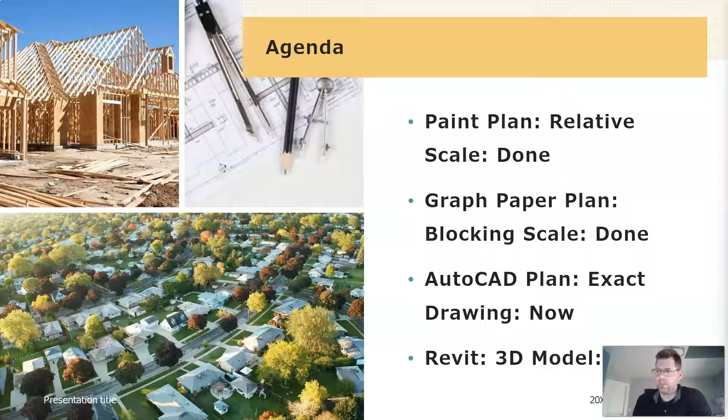And then next up after this, once we're done, is Revit. So our 3D model, super excited about that. I can't wait. And these AutoCAD drawings are awesome too.

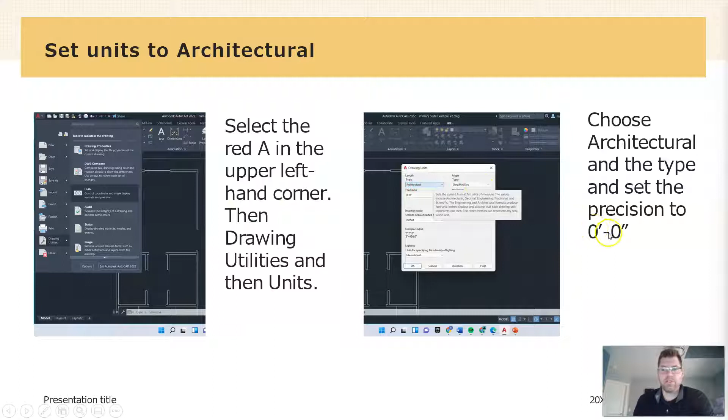So again, we'll cover how to go from graph paper to AutoCAD, and use this as much as you need when I'm not available. What you need to do right off the bat is set your sheet up. I'll do this in the video as well. So you go to the A, go to drawing units, and then inside of that, you're going to set it to architectural. So this is going to be feet and inches. And our precision is just feet and inches right there. So we're not going to go into fractions of an inch at all.

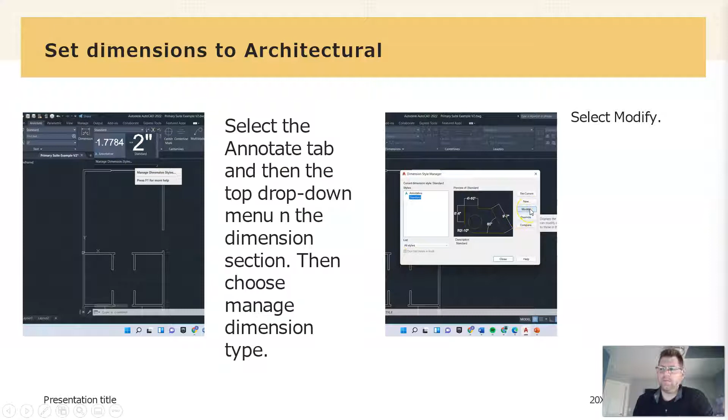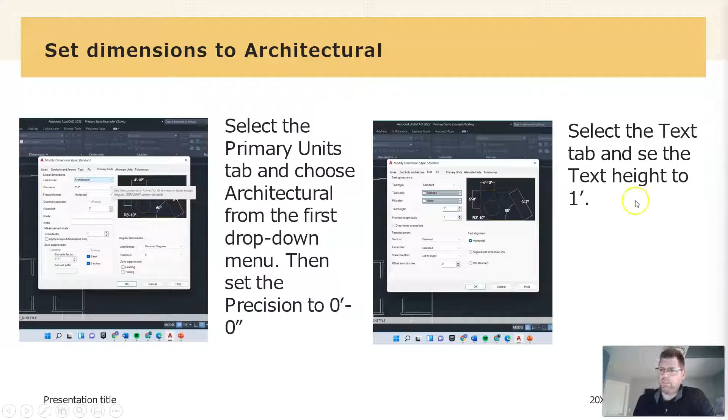And then change your primary units to architectural, just like we did before, and precision to feet and inches, no fractions. Then jump over to the text tab, and change your text height to 1. So it's going to quickly allow you to see the full text height when you bounce around your walls. I'll show you what I mean here when we get to the tutorial video.

When you are drawing and you have a question on the size of a room, or mainly small spaces like a mudroom or laundry or some closets, and you're like, how do I configure this? How should I design this? I have to make some changes at this step. Houseplan Helper is a great website to just use and search and become familiar with when I'm not available to answer your question directly.

And then as we go further, and you have to put in fixtures, so vanities, sinks, tubs, toilets, kitchen counters, fridges, stoves, all of that stuff. They have a size range definitely, but they're going to be generally similar sizes and dimensions. Dimensions.com is the best spot to go for up-to-date sizing for all of that stuff. My video link will be here.

And then again, to get credit for the introductory lesson, whether you did it in class with me or you're following along here or just doing review, you'll have to set up your sheet correctly. You have to create single lines to size. You have to create wall thickness, add wall bucks, and then cut out doors and windows. So those are the key things that will get you the right steps to set up your file. So let's jump over to AutoCAD.

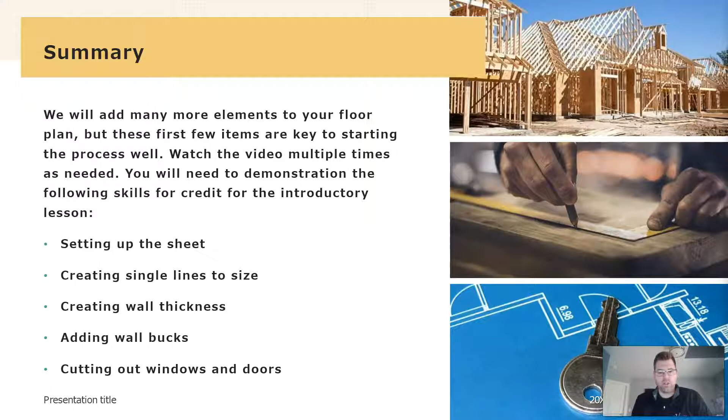So we'll pop over to AutoCAD. And we started with this master suite, and then we had the 2 closets that we did in class. And so for this lesson, I'm going to add on over here. But like I said, I'm going to review a little bit of what we've done so far.

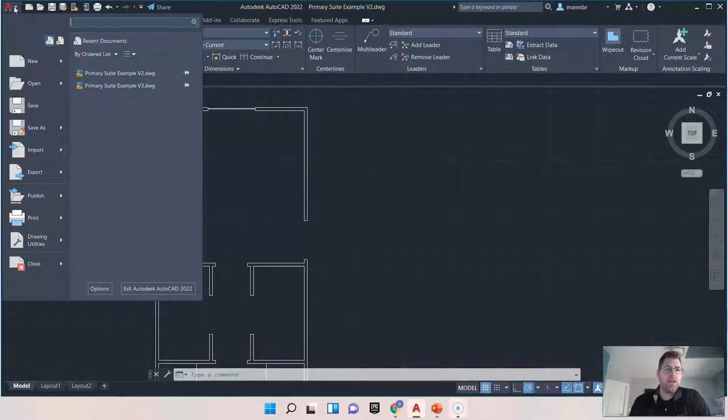So I'm going to hit the A, and I'm going to make sure you know how to change your drawing units. Go to drawing utilities, go to units. And then inside of that, just make sure you set it to architectural and precision to feet and inches. And you can just hit OK.

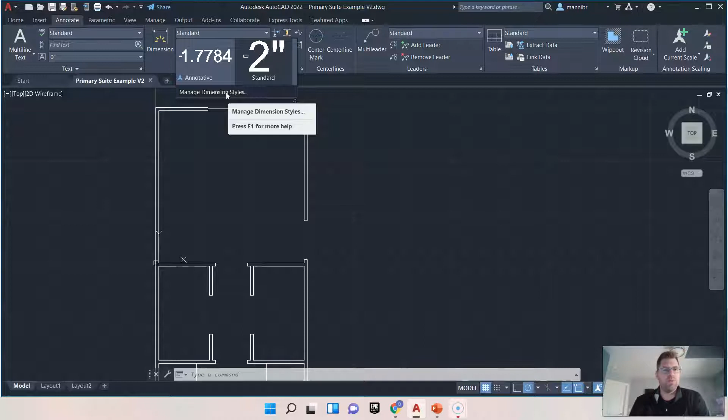That is crucial to get started. Next, you will want to go to your dimensions, so your Annotate tab, and then your dimensions section. And inside of that, standard drop-down. I don't really like where this is located, but this is how you get to it. Manage dimension styles. There's probably more than one way, and there's probably a command shortcut, but the visuals work good for video. We'll go to Modify,

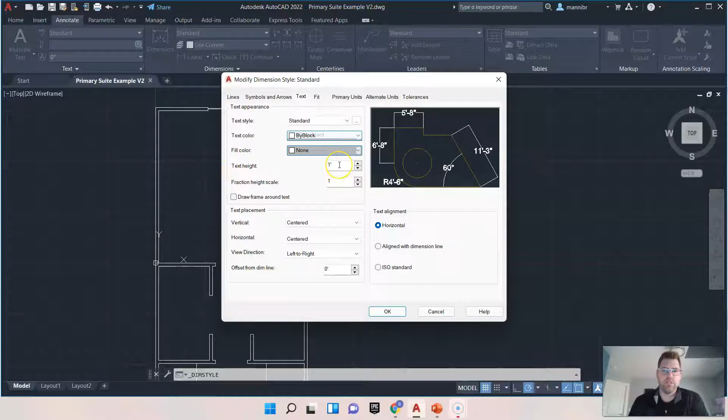and then primary units, so the middle tab, again, architectural and feet and inches. Then go over to text and change your text height to 1 foot, and that should be good. You can change it later if it's not big enough or it's too big, but that should be good for what we're going to do. And then hit OK and close, and there we go.

So even if you don't have this on your screen and you want to get the skills, we're going to jump right in and start drawing. I'm going to choose the line tool, and I'm just going to snap from this corner. Now, if you don't have this previously drawn, you can type in 0,0, and that'll start you at the origin. So I have a master suite here. Let's say I want to add on a living room next to it. Living room, large size, maybe 22 feet.

I can type in 22, and then I need to type in the foot symbol because our default is in inches. So anything we type in and just hit enter without any notation is going to be inches. So we need to put in the feet symbol to get that exactly. So that went down about that distance.

And then I'm not going to be hung up on a size so much. I'm going to go over here and pull my polar snap out. And that's going to be 16 feet. Probably a little small for what I want. So I'm going to drift down and type in 20. I want it to be a little bit rectangular, more than just boxy, 20 feet, and hit enter. And so this is what I mean by being able to set lines to length.

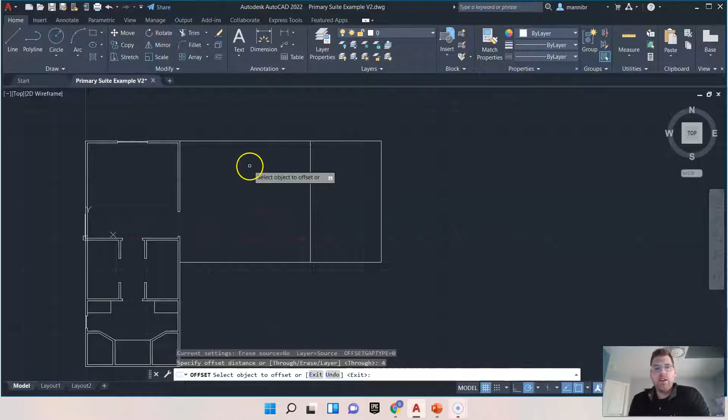That's going to set my offset to 4 inches. Any line I want to offset, I can just click and pull forward. It's good to have a bunch of lines done at once so you can see how quick this process goes, so I'm going to hit all of them, knowing some will need trimming up here in a minute. Right click, hit enter, and those walls are good, with a 4-inch thickness.

Exterior walls are usually thicker, maybe because of brick or siding, or they have extra insulation if they're built with 2x6, but we're not going to worry about that right now. Too much to worry about.

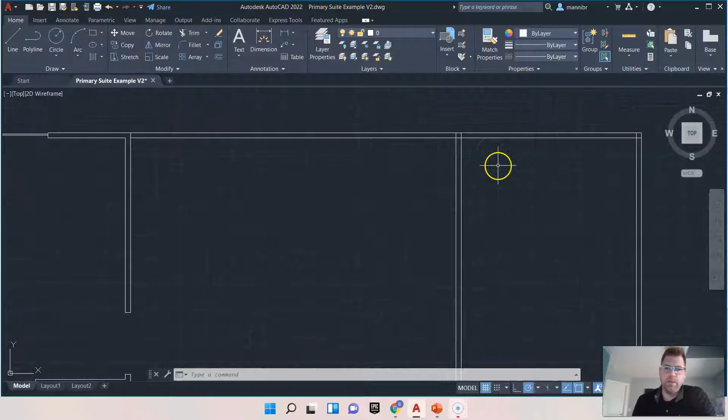So you can see all these little cross lines in here. We can quickly trim those out if they bug you. They tend to bug me right away, but it's not a big deal. If you just want to leave them and come back to them later, you can do that.

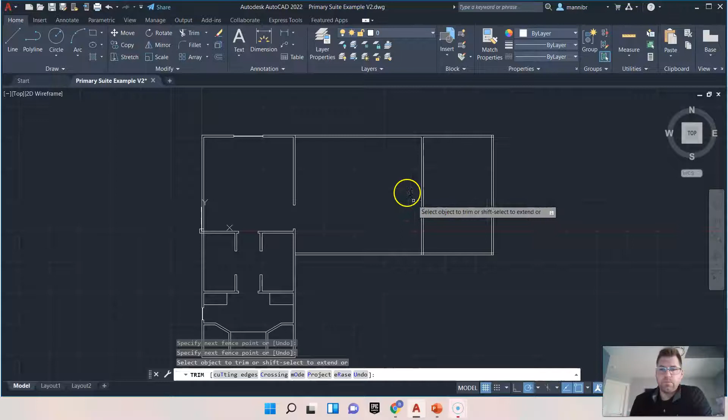Let's say I want a large archway between this informal dining room and this great room here. I need to chop some of this wall out. So I'm going to come off my main wall and put in a corner buck, or just a little wall extension where I can build my archway on.

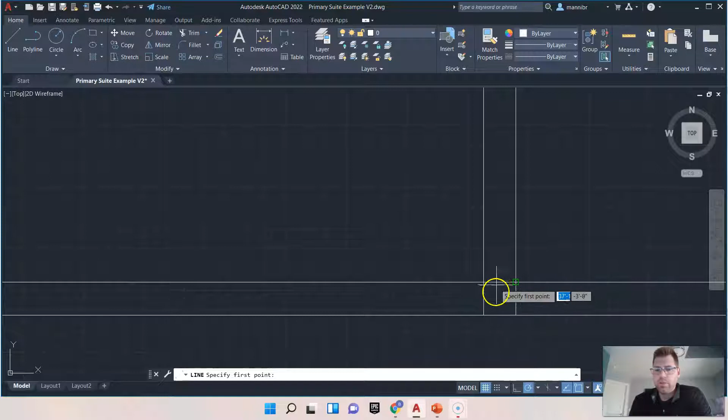I'm going to come off a foot. I can come off a foot with an offset off this entire line, or I can trim this out and redraw it in. So I'll do that - I'm just going to trim this out. It's kind of convoluted, but I'll show you why in a minute, why it works. Go across, boom, right click, enter.

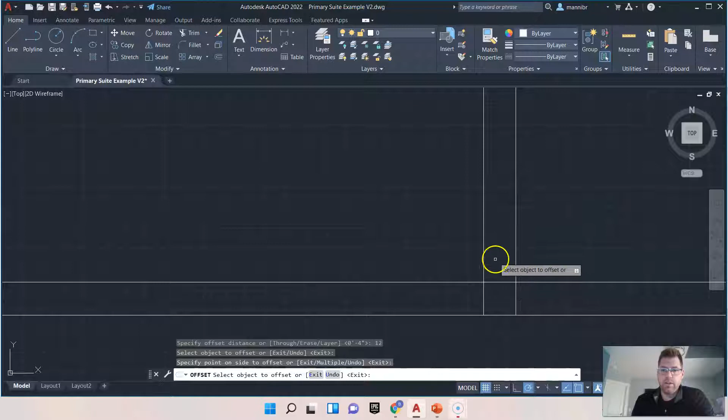My offset, 12 inches - that's a foot. And I'm just going to pull that up. There we go. I'll show you the difference on the other side - there is no difference, so I'm going to have to hit enter. See, again, that's one of the reasons I don't like trimming right away, because a lot of times you're going to use these.

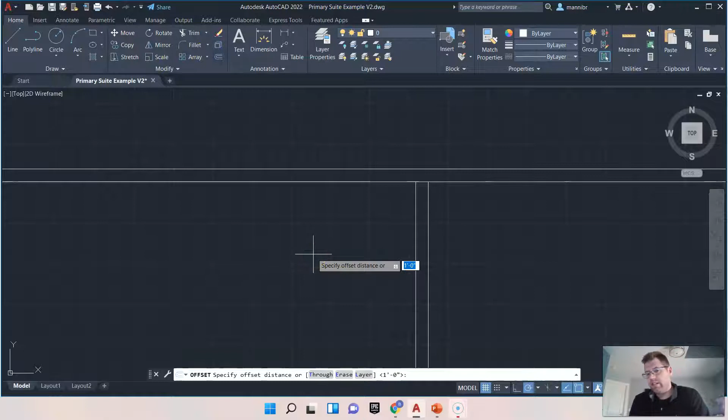Now my offset's already set to 1 foot, so I can just hit enter if I'm using the same thing. I can go here, 1 foot, great, enter. Now I wanted that wall placement - I needed to know where it was going to be, but I don't need it all right now. So I can trim those two out, and if I want, I can hover in and knock those out right now as well.

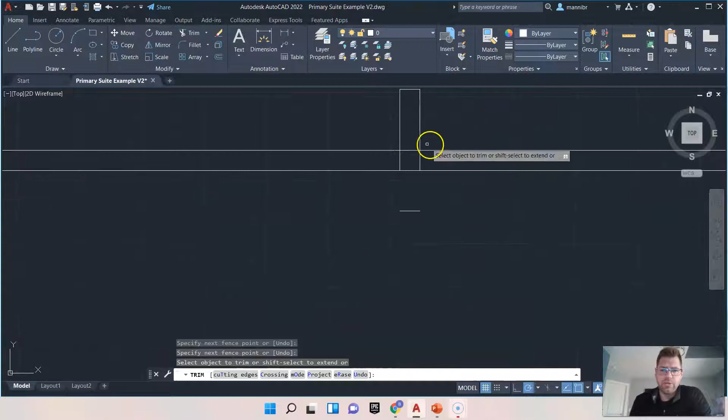So you're going to do a lot of that type of setup that I just did, drawing some walls. Look at that, I went a little bit too far, so I can just run and extend, trim, extend. Sometimes I really like it when I make an inadvertent mistake, and I can kind of show you that - sometimes it bogs down the tutorial, so I like to try to keep it crisp as best I can.

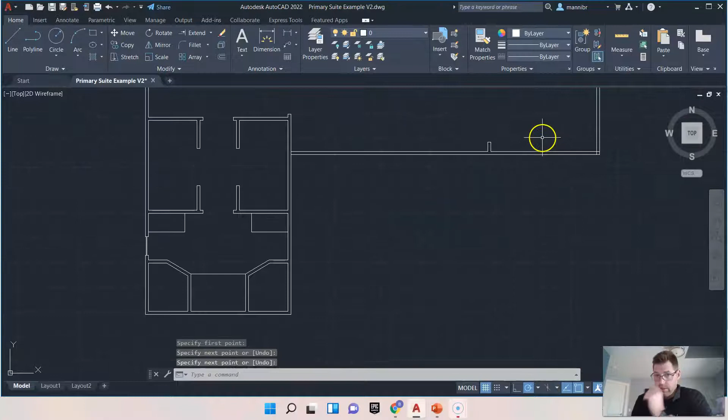So I cut out a large opening, and we can put an archway in there. 20 feet minus 2, so around 18 feet. It's pretty big - we might need to add more distance from a construction standpoint, but we're not going to worry about that right now.

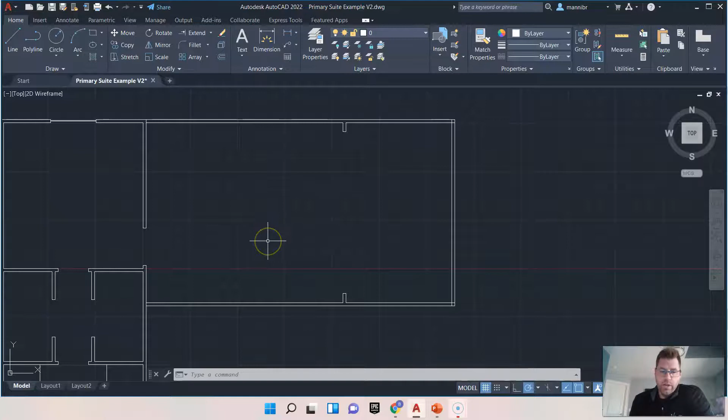So let's say I want to add some windows. I have this large great room here, and I want to add some window cutouts into that. I'll come up with a little bit of a design. So I'm going to trim this here just because I'm working with it and I don't want it to bug me.

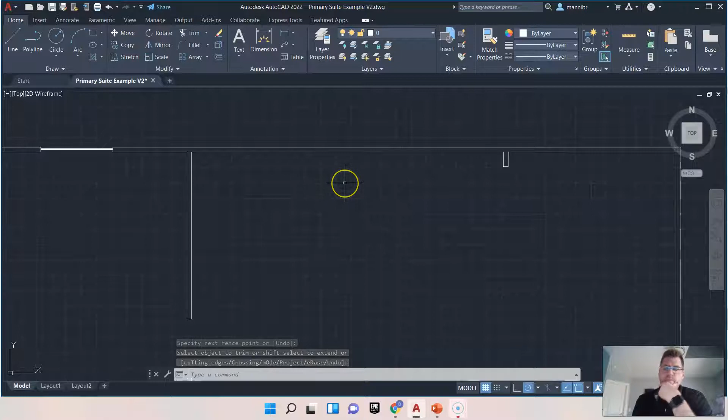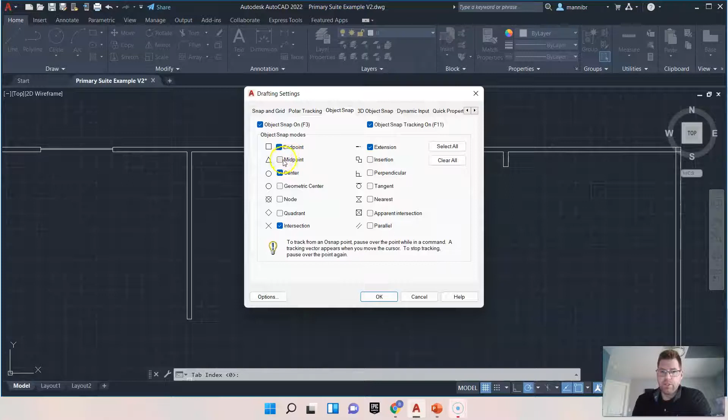So let's say I want to be dead center. One of the things you may have to do is set your midpoint - that's not on by default. We're going to drift down to the bottom tray, and the second one over is your snaps. Right click on that, go to snap settings, then in there go to object snap and make sure your midpoint is turned on. Comes in handy. If your snaps are bothering you while working in tight quarters, that's how you turn them off as well.

So I'm going to establish my midpoint on this line. Notice I have it trimmed - it's not a full extended line. I went from this wall to this wall, so I know I'm in the midpoint.

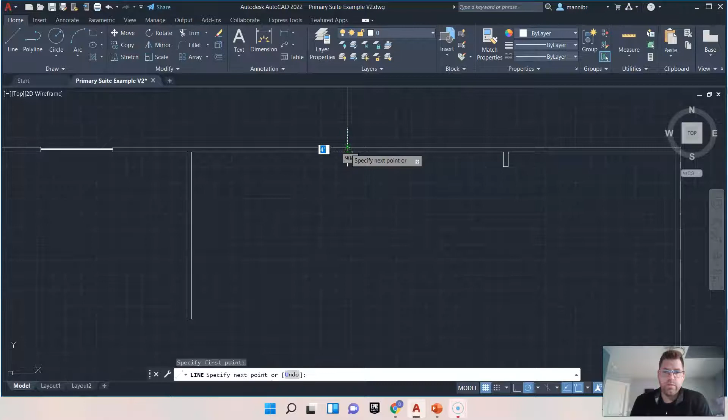Now, window sizing and stuff like that - you can kind of just design what you want, but there are pretty typical sizes, and the bigger you get, it's kind of like an exponential cost. Windows are expensive to replace if they break, so you don't want one ginormous window - you want to have multiple.

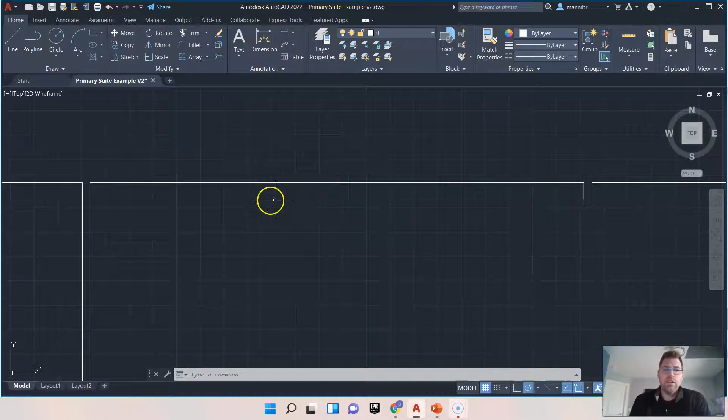So I'm going to do a 5-footer in the middle, and then two 3-footers on the side. I'm going to set my offset at 30 inches, so 30 plus 30 is 60, that's 5 feet. I'll go 30 in one way, 30 in another way, enter. Then I'll run up and hit trim, and I can quickly knock everything out.

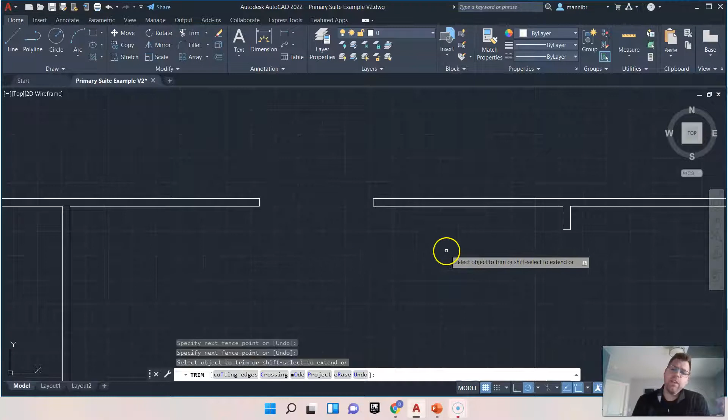So there's my window opening. I'm going to add a 3-footer over here and a 3-footer over here. Now I need some wall left in the middle. I'm usually going to need a trimmer and a king, and probably another trimmer and a king, so that's going to be 6 inches minimum.

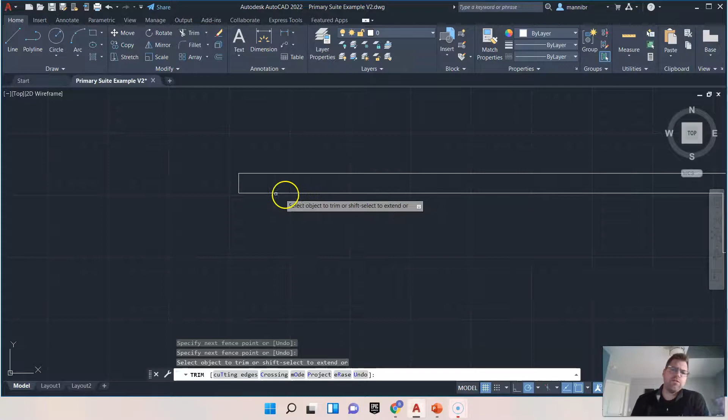I also have to think about window casing. How big is that going to be? Usually it's 2 inches. So I need about 4 inches from that standpoint, plus a little bit in the middle to paint, so 6 inches is the minimum. Let's just run with that.

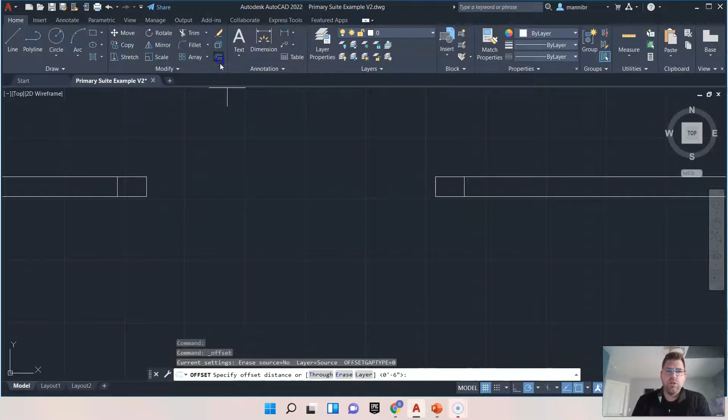So I'm going to type in 6, enter, and go here, over here. Then I'm going to put some 3-footers, so I'll go 36 inches, and run an offset from that over here, and from that over here.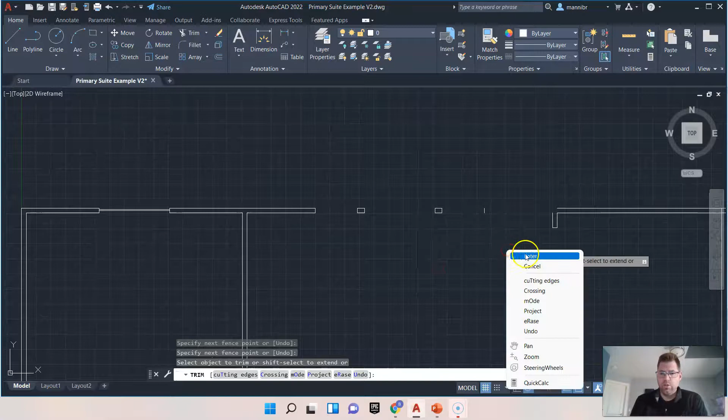Then I'll trim out the middle and zoom out. Looks like I got a little overzealous, so I'm going to hit some Control Z, and I'm going to hit retrim on this. There we go.

And so now that would be how you can cut some windows. So I'm going to hit Control S real quick.

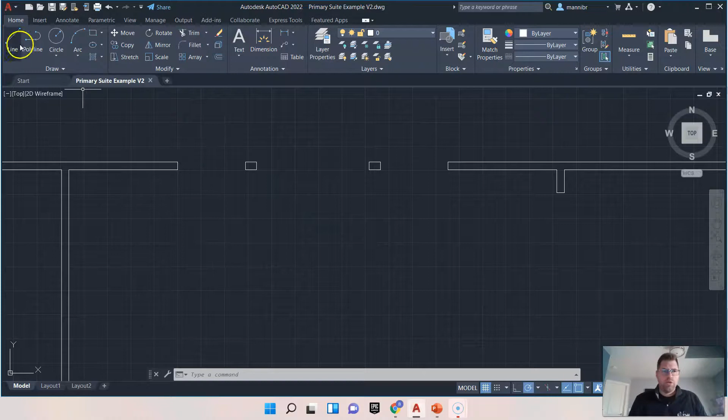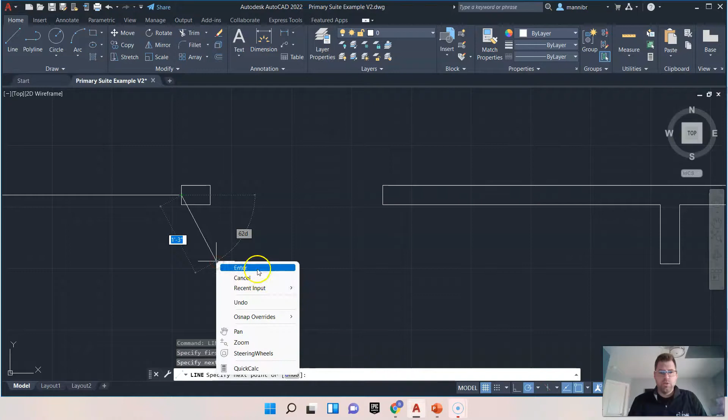Most students, including myself, I don't like that — I want it enclosed just for visualization. But I would leave as much of this window work as possible until later. Here's what I mean: you can just go midpoint to midpoint and establish that you have a window pane in there. If you're good with that and can just let it hang, that's fine. But I'm going to show you what you do have to do eventually at some point.

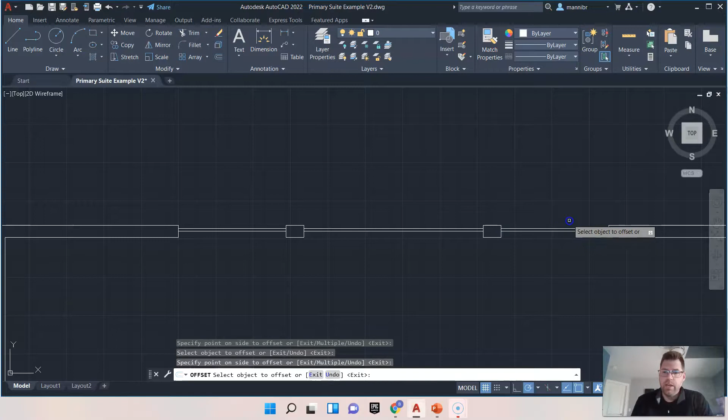Snap to the middle there. So I have to add a thickness to it. Everything is cut from 4 feet off the ground, and windows have a thickness to them — generally we're just going to go with 1 inch. So I run my offset to 1 inch, click on my line, and run it out on the outside, and that represents my window pane. We can change those colors later.

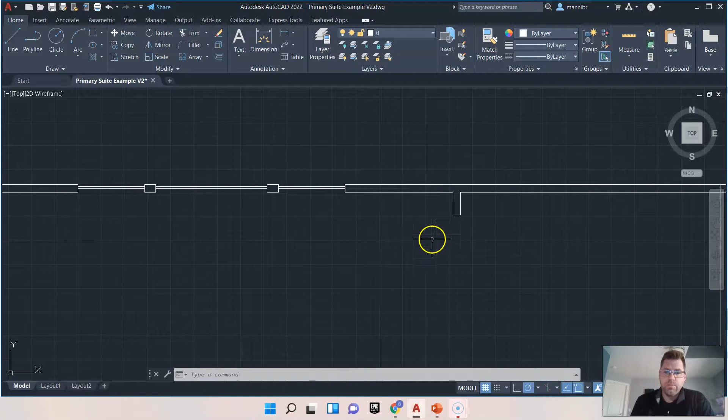So those are the basic things I'd like you to be able to do to start. We ran some single lines, made a couple rooms, so I'd like you to do all of your rooms in single lines. We set the thickness of the walls. We did some wall bucks or openings, some large opening cuts, which can be for a door or double doors — we did that over here on this side. Basically the same format: you put some offsets off the wall and then clean it up.

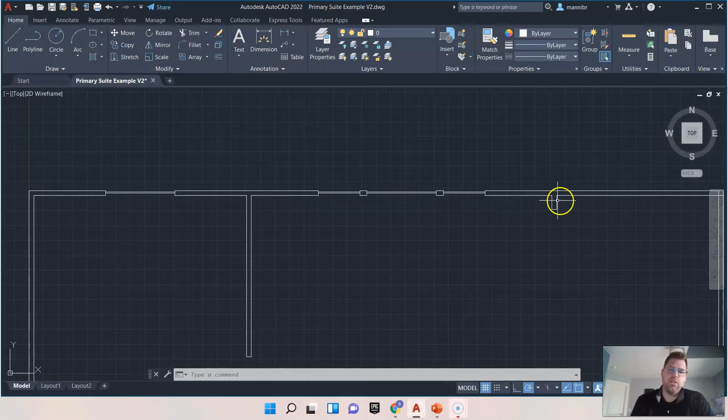And then we did some window cuts. Usually we found our midpoint, or if you have specific spots, you run an offset to get to that line, then divide it and create each edge, cutting them out. We talked a little about how much room you need between windows — that's 6 inches for the construction studs that go in there. And then we talked about the window panes. So those are the good skills to get you started.

And even if you set something like this up and don't have the original closet and primary suite that we did, that's totally fine — you can still show me those skills.